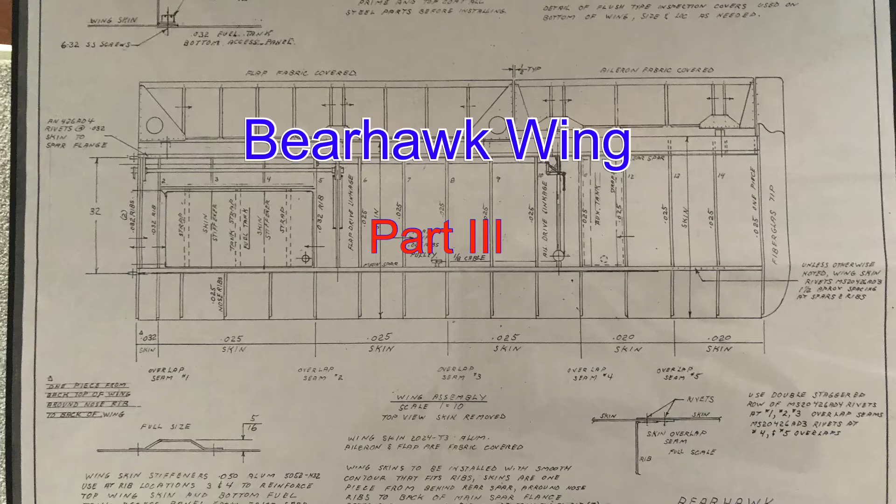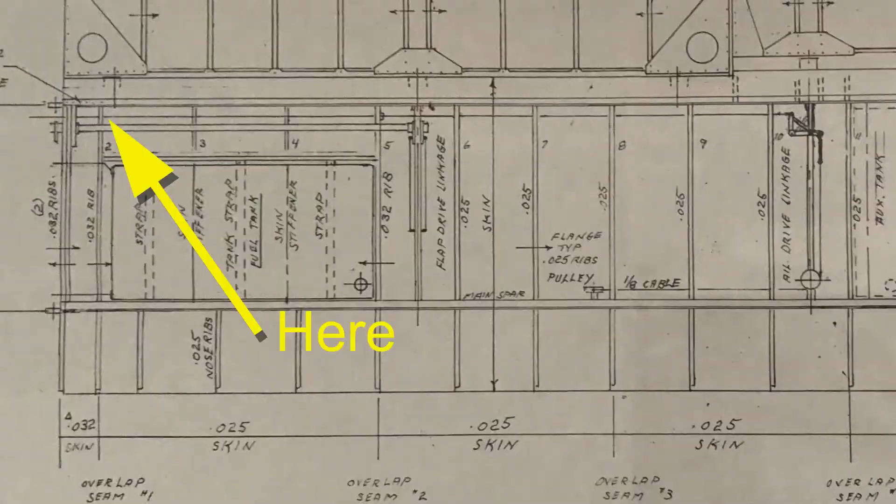In this clip, we're going to talk about how I routed the aileron cable from the wing root to the bell crank. We'll start by cutting out a poster board template that'll match the profile of the rear lower corner of a wing root. Then trace the position of the fairlead from the rib you can actually get a pencil to. Then we'll use that template to mark the position for the holes for the first few ribs up until the flap linkage. They'll be at the same position.

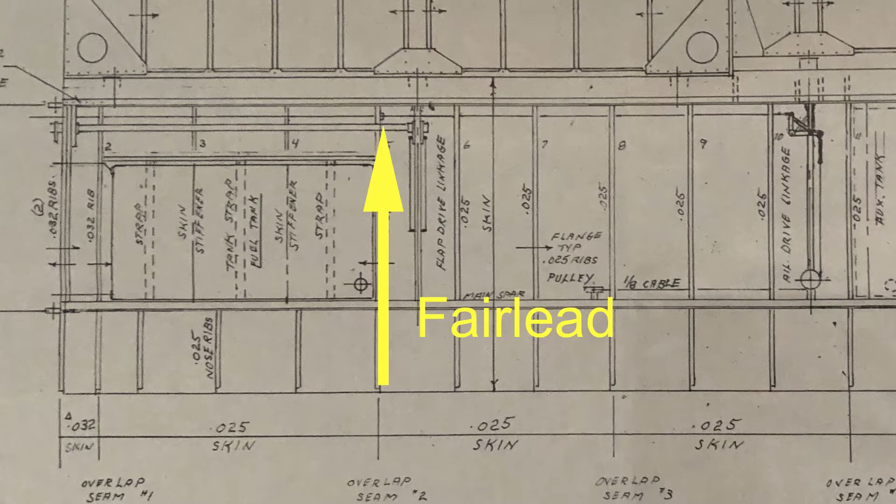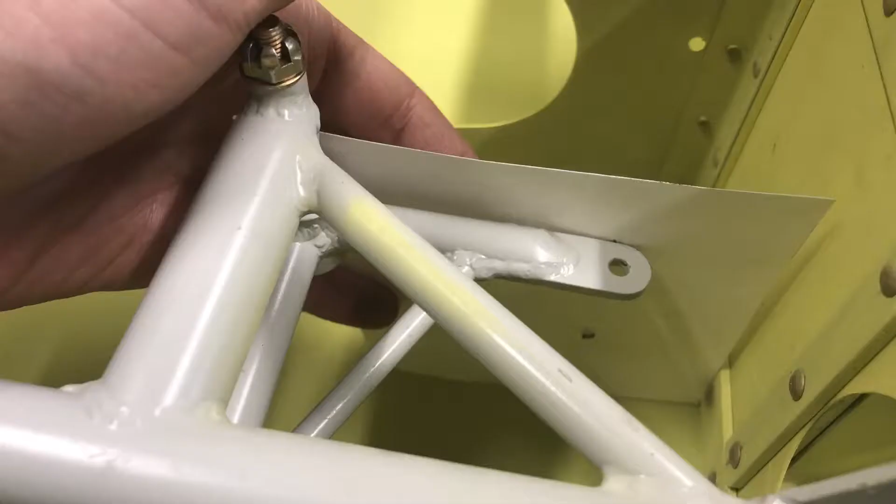From here, you'll find that you need to angle upwards to get to the same height as the bell crank by the aileron actuation mechanism, which is going to require a fairlead to handle the angle change. Here I'm double checking that the hole position that I've established is going to clear the flap mechanism in that respective bay. So now on that same template, I mark where the cable is going to meet the bell crank and establish a position. Measure the difference between that and my original mark for the first few holes in the ribs, and then determine the difference, which is 1 5/8.

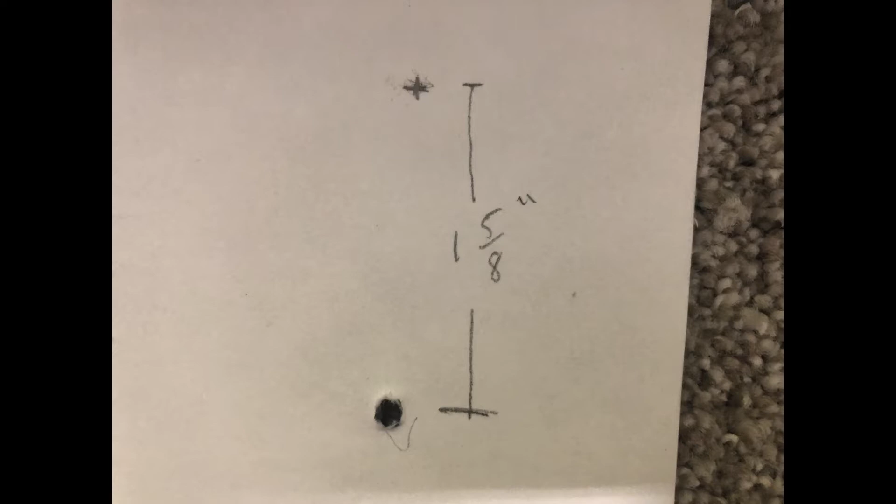Now if you do a little bit of math for the distance between the ribs, you can see that each mark needs to be about a 1/4 inch from the neighboring mark. Now I measured to the nearest 64th just to be anal retentive, but you don't have to do that. I think about a 1/4 inch will work.

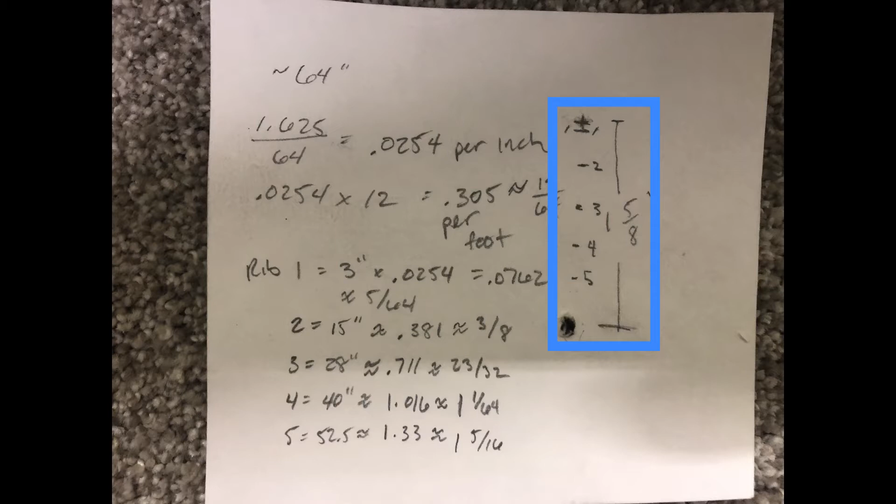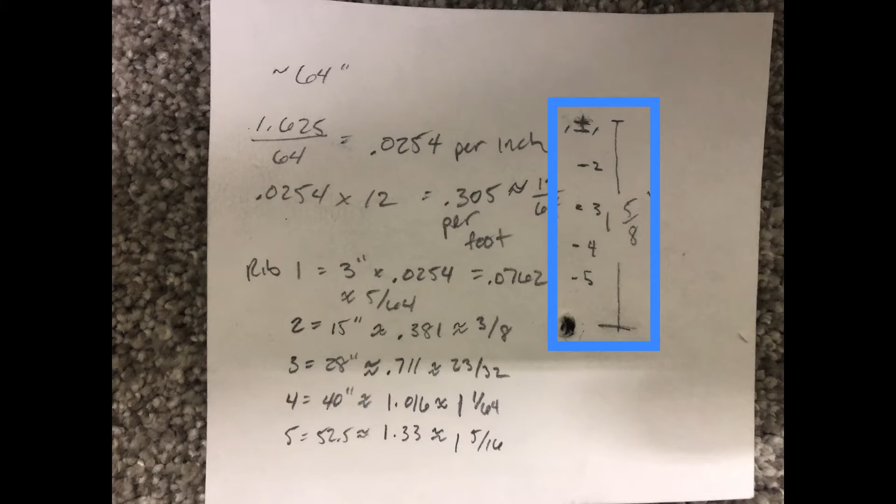Now if you look at the marks I made, the plus near the top is where the bell crank actually is. And then the first rib is obviously very close to that, so it's not much of a difference. And then about a 1/4 inch down from there will take you back to your original position in the first few ribs. So then I marked, punched, and drilled some pilot holes, marked my unibit, and got to work.

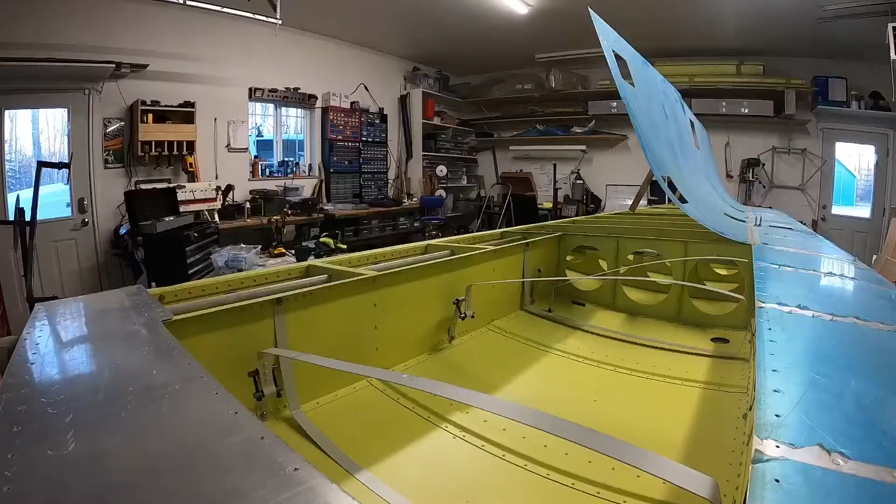So this is the second rib from the bell crank. I got the reinforcement aluminum piece kind of positioned so you can see how that's going to fit. The hole is going to hold this large snap bushing. I've punched out where I want the rivets to go already, traced out everything I want on this plate. So now I'm going to drill a couple of holes

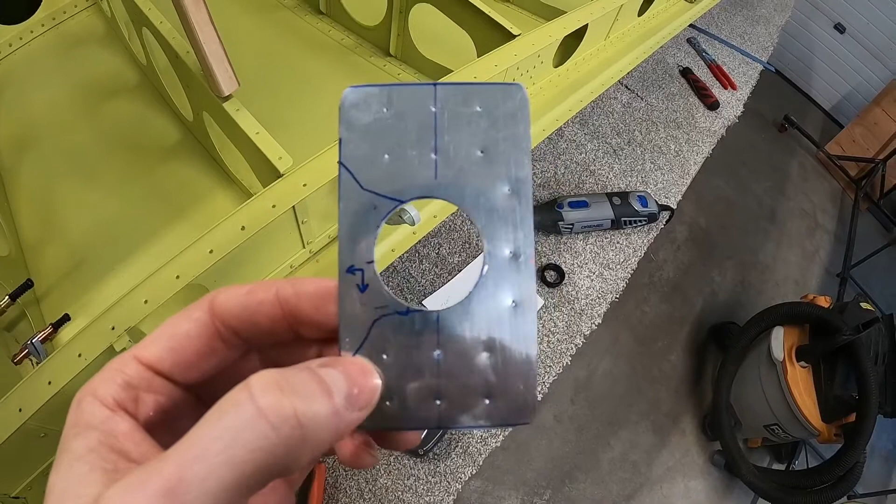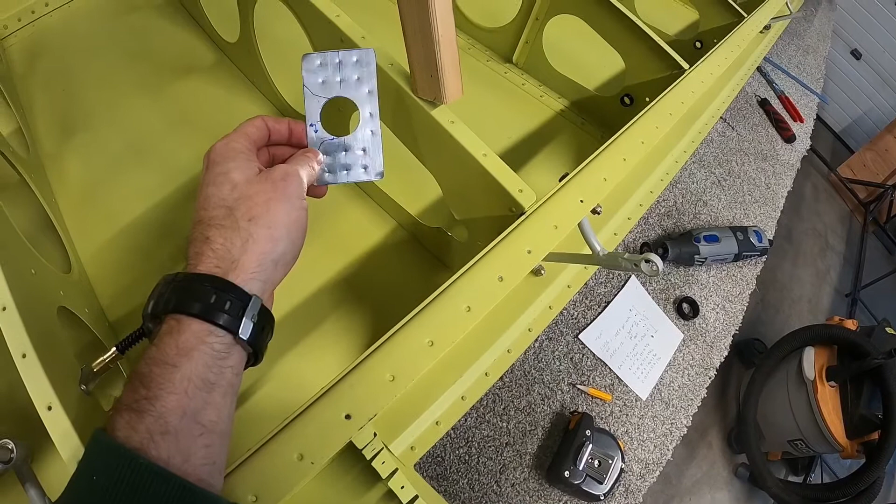and then get this in place, match drill the rest of the holes, take it back off, deburr everything on the plate as well as the rib, and then I'll put it in place with some Clecos, make sure that this cutout matches the plate well enough, and then I will rivet it in.

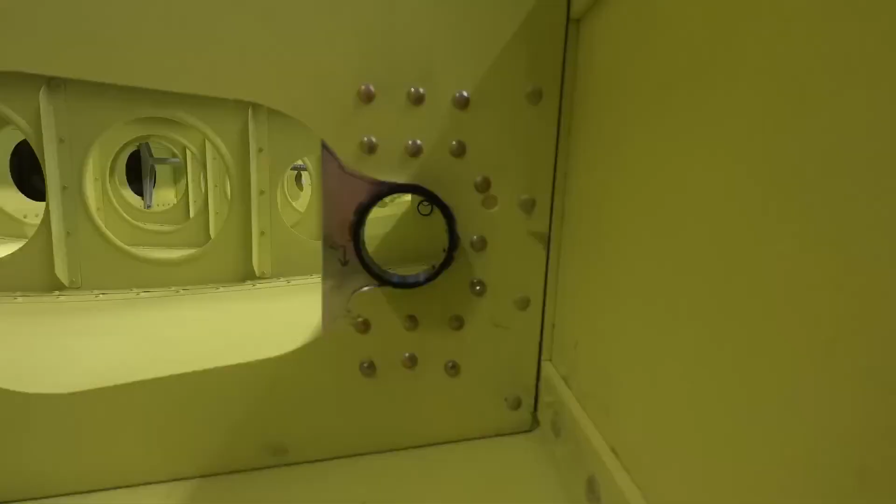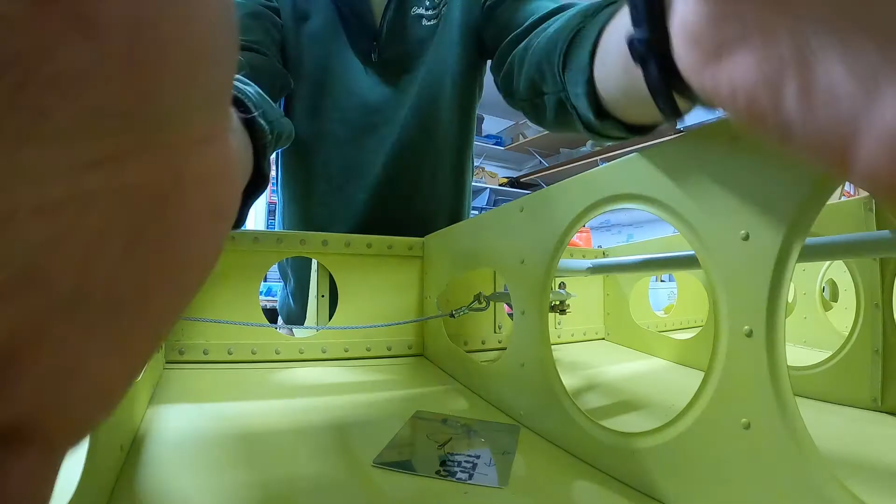It seems worth noting that the range of motion of the cable is pretty significant at the bell crank and decreases as you get closer toward the flap actuating mechanism. So the first hole is really large, and then I tapered down for a couple of holes using decreasing bushing sizes. That's why you see the large bushing close to the bell crank, and then in the rib adjacent to the bell crank, it's a really large, awkward hole.

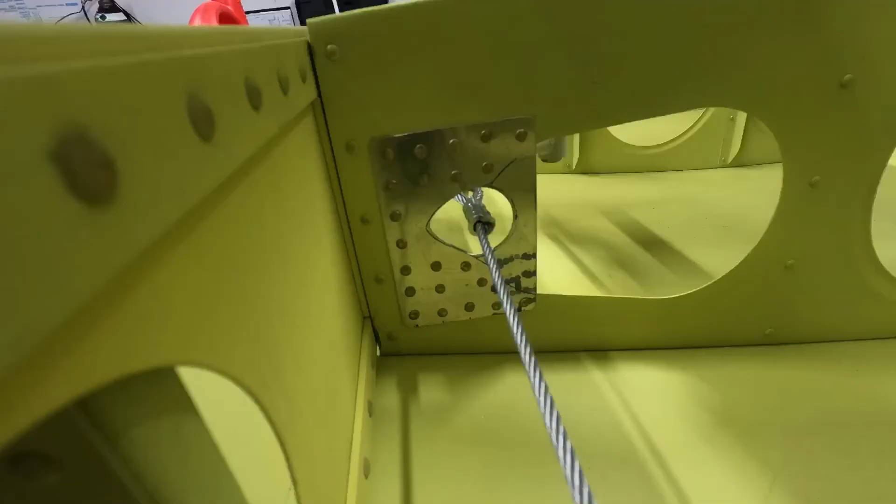Swaged cable runs through the rib here, so I need to keep that open throughout the range of motion. I need a little more clearance here at this end, and then it looks like I'm pretty good out here. I may just give myself a little more clearance, but right now it's pretty close. So here are a few pictures of what I wound up doing. Kind of an egg-shaped hole that gives me plenty of room for the thimble to pass through the rib.

Okay, hopefully you can hear me over the utilities in the background.

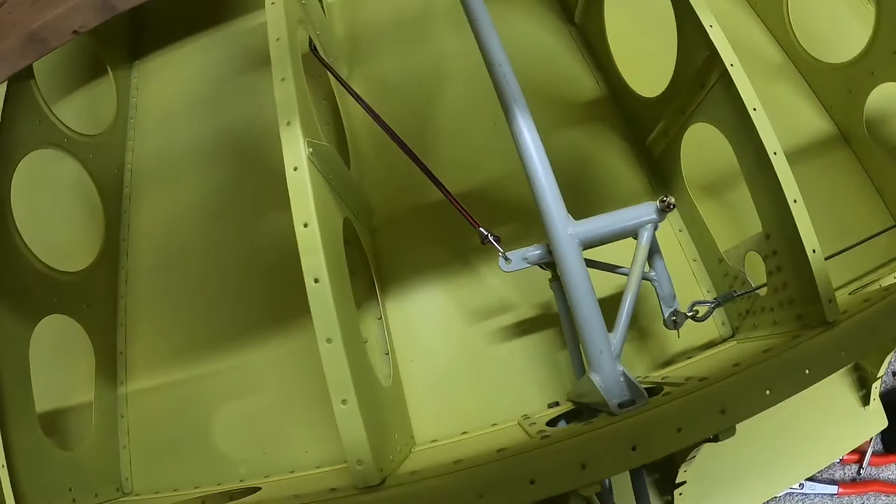But now I've got the bell crank hooked to a cable. You can see, don't worry about the bungee cord, that's just for playing purposes. But I've got this hole cut out so everything fits through with a little bit of margin. Put this backer plate in. Then we'll go to the next, the largest bushing, with another backer plate. You can see they get smaller as we go.

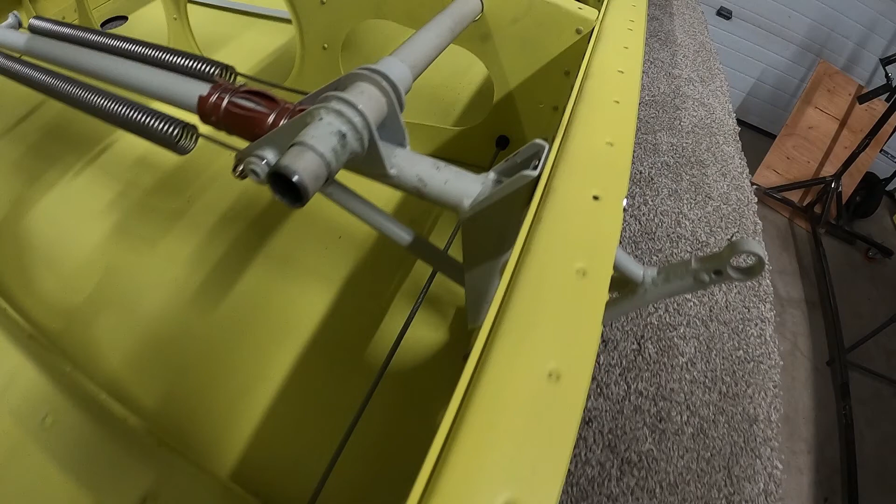Whoops, there's no fairlead here. I'll fix that later. And this is the straight shot out to the fairlead. In the other wing I put a fairlead right here because it kind of starts to angle upward a little bit there. I'm going to take some time now to put these fairlead holders in.

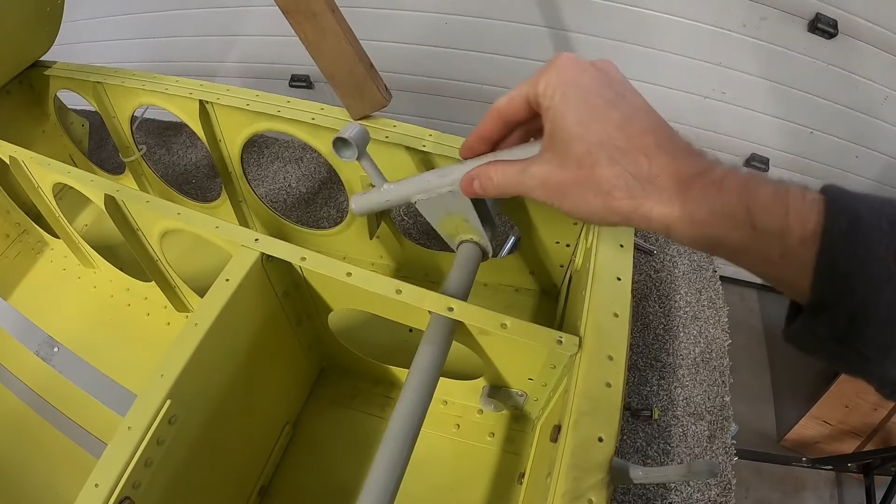This one pops in pretty straightforward. This one, however, you have to take a couple of bolts out so that this can come up and you can access the holder there for these little gizmos.